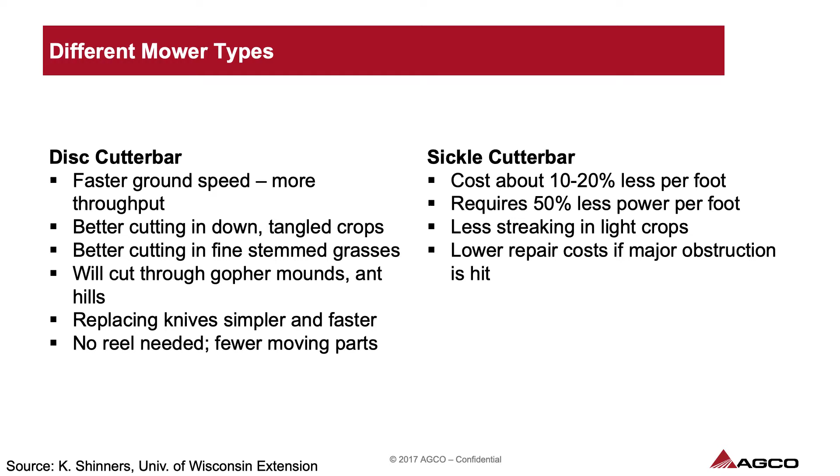All right, so we talked a little bit about that stand persistence and environmental stewardship, and it was really a concern whenever our disc mowers started coming on the market here in the United States, that because we have the opportunity to cut so much closer to the ground, we're not going to get that same stand persistence as what we were afforded with the sickle bar mower.

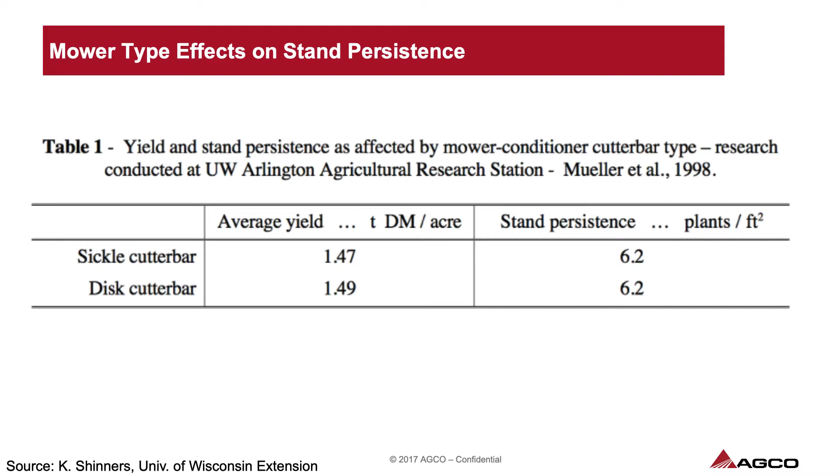But what we can see here in this study by the University of Wisconsin is, here's our sickle, here's our disc cutter bar, and if we're taking a look at the average yield in terms of tons of dry matter per acre, we really saw no difference in terms of overall yield. And this is really the important thing, this stand persistence in their alfalfa in terms of plants per square foot. And this is a year-over-year study looking at the disc mower over and over versus the sickle bar mower over and over. So keep that in mind.

Now, there are some ways that you can decimate a crop with a disc mower if you have that adjusted incorrectly. If you have that angle too low, if you're scalping the ground, and you can scalp the ground before you even realize it, that of course is going to reduce your overall stand persistence in any type of crop. But if you're still maintaining that 2.5 to 3.5 inch cutting height because you have the angle of your discs tilted back a little bit, then we're really seeing no reduction in overall stand persistence.

But what we wanted to look at was what is happening if we run this machine at different PTO speeds. So for our mowers, we're going to recommend anywhere from 520 to 550 RPM typically, but that doesn't mean that that's what our operators are doing. And also, what happens if we run this at different ground speeds?

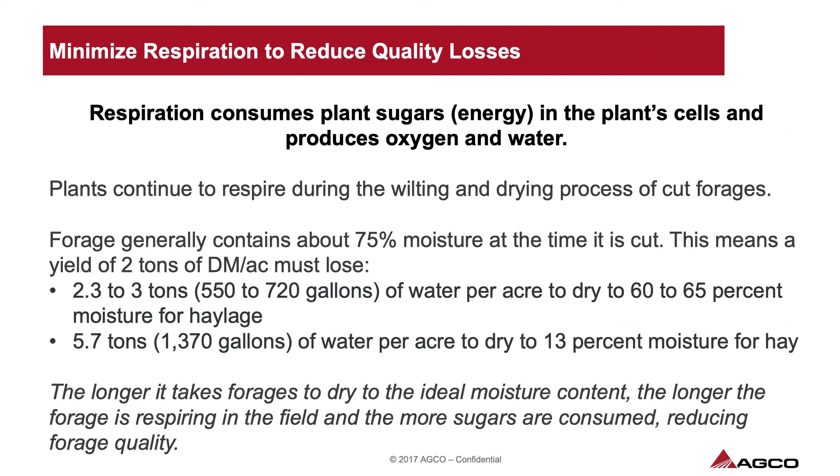I've never seen a 520 PTO cutter. Seen a 540 or a 1000. 540? Yeah, that's fine. That's still in that recommended range. But I mean, that's the way the equipment was set up for. So why would you want to run it at 420 or 620 when you weren't running it for that?

So a lot of times, we did this in conjunction with our product specialists, who are the guys that are out in the field talking to the customers. And there's misconceptions that if we run this faster, we're going to be getting a better cut quality. Or if we run this slower, we're going to be getting more of an effect of like a sickle bar mower, where it's going to be cutting much slower but a better cut quality. So that was the point in this project, was just to make sure that regardless of what your manufacturer recommendations are, we are still remaining within those recommendations.

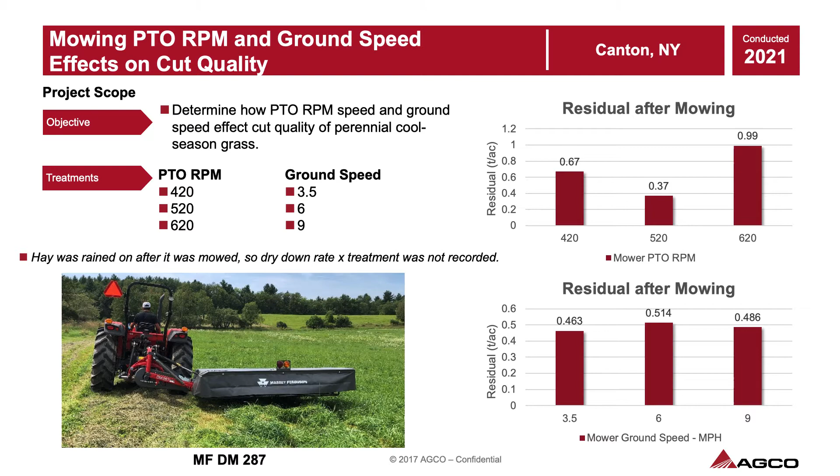And so this goes hand in hand with what Chris talked about a couple of minutes ago. And we're talking about respiration. And so refer back to what he was talking about with the goal of getting that plant down to 20% moisture as quickly as possible. That's really the name of the game if we're making dry hay. If we're making baleage, then we're going to be getting that crop to a much higher percent moisture, or haylage, or round bale silage, or whatever we want to call it. But the goal is to get it to that targeted moisture level as quickly as possible.

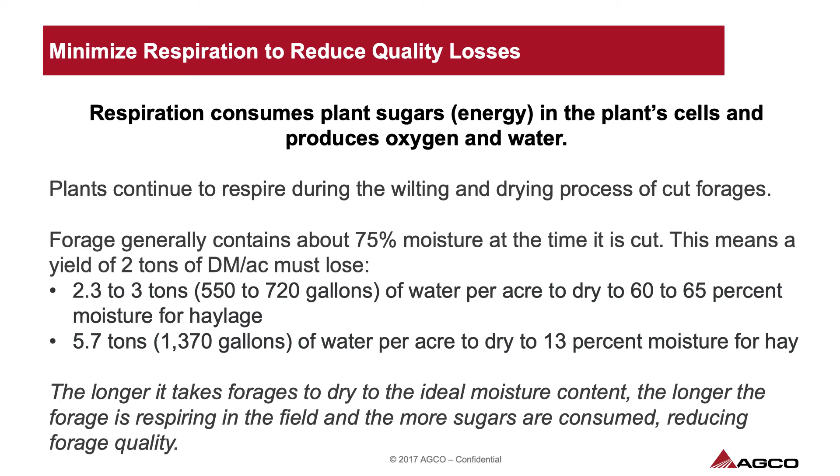And then whenever we're going from that 60 to 20% or 60 to 45%, if that's your goal for your round bale silage, or 50, or whatever the case may be, a lot of that is going to be dependent on your management practices. Are you conditioning? Are you laying your swath out wide and flat? What is your crop yield? And are you matching your conditioner settings to your overall crop yield?

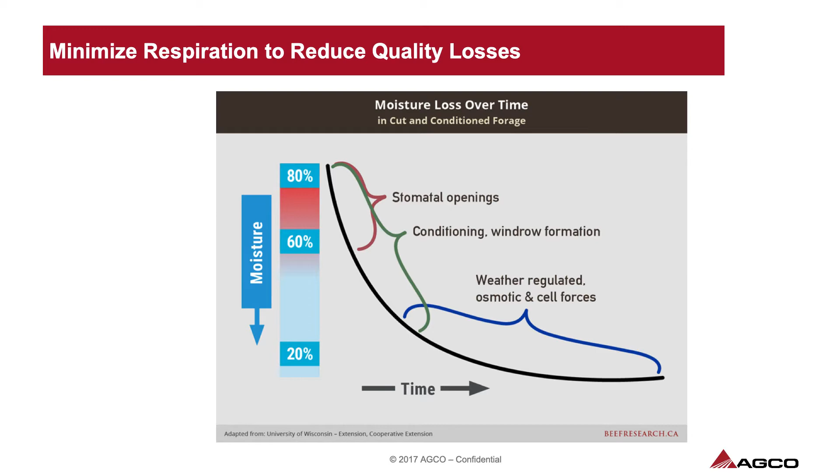So let's go in and talk a little bit more about all of those things here in the next couple of slides. Once again, Chris showed this, so we have a lot of overlap in our slides. We probably should have consulted first, but that's okay. We'll just keep talking about it.

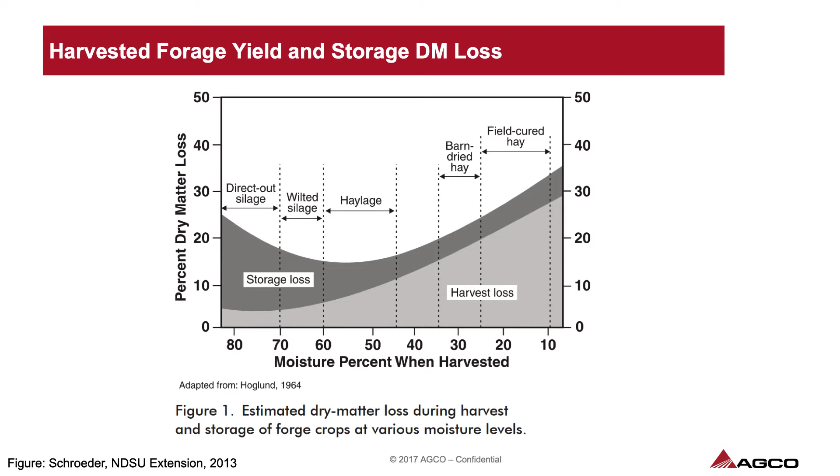Yes, a little bit of that is ash and soil content. A lot of that is the valuable nutrients that we were talking about in Chris's presentation, and it's flying out the back end of your baler. It's not being captured, it's not being baled. That's where a lot of these harvest losses are coming into play.

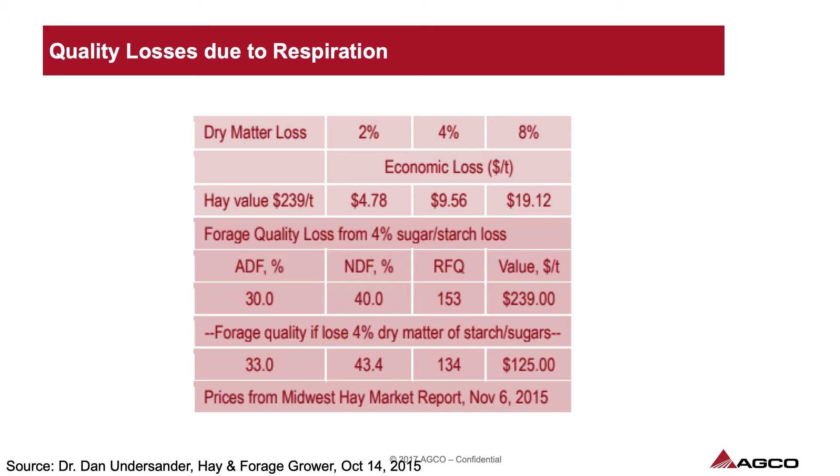This I'm going to breeze over very quickly because our hay values are going to change, but essentially what I wanted to show here was the difference a dry matter loss can have. This is looking at a $239 per ton hay value, so pretty good alfalfa hay, and what the difference is in terms of loss based on the dry matter loss within your crop. So, moral of the story is reduce your losses as much as possible.

So one of the ways that we can try and dry our crop down as quickly as possible, since we know it's important to get it to that ideal baling or chopping moisture as quickly as possible, is by using a conditioner. Typically, there's going to be two different types of conditioners. We're going to have a flail or impeller conditioner, and that's what you see here at the top. Typically, this is going to be designed for grasses.

But if you only have one mower conditioner and you're doing grasses and alfalfa, or in Europe, where I work quite a bit, grasses and clover, there are some machine adjustments that you can make if you have an impeller conditioner to try and conserve some of those really valuable leaves on your forage crop. What this is going to do is create a stripping effect.

So the goal of a conditioner is to somehow break that naturally occurring environmental defense that our forage crops have during a drought, or whenever they are cut, or whenever they think they're going to die. They have that waxy cuticle layer that helps to preserve as much moisture as possible, so we have to somehow get through that. And they also have stomatal openings, and whenever they close those stomatal openings, that helps to reduce overall moisture loss.

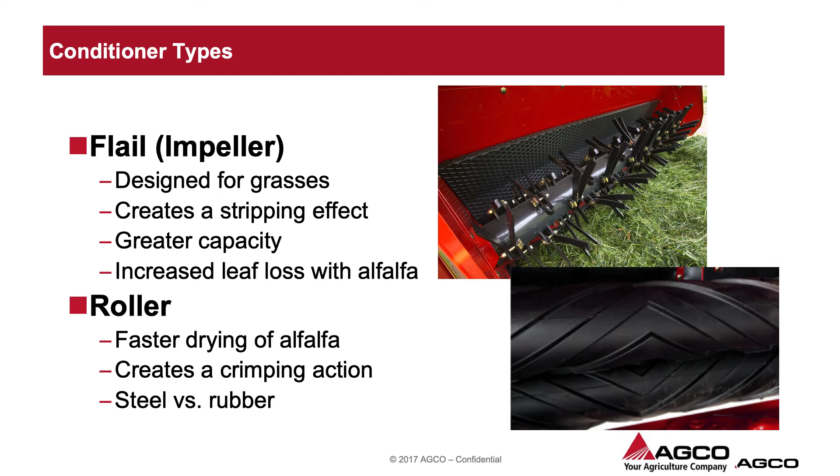We're going to talk a little bit about tension here in just a minute, but the goal is to break the stem or crimp the stem and not crush it. We don't want to bruise the crop. We don't want to remove any of those valuable nutrients. We want to crimp it and allow that moisture to dissipate from the stem without reducing any of the overall forage quality. So this is kind of what they look like close up.

I found this illustration really valuable from one of Dr. Dan Undersander's publications. And so essentially what's happening here with the impeller type conditioner is these tines are using this hood, this conditioning hood here, to actually create that abrasion across the leaves and across the stems of the grass. And it's helping to combat that waxy cuticle.

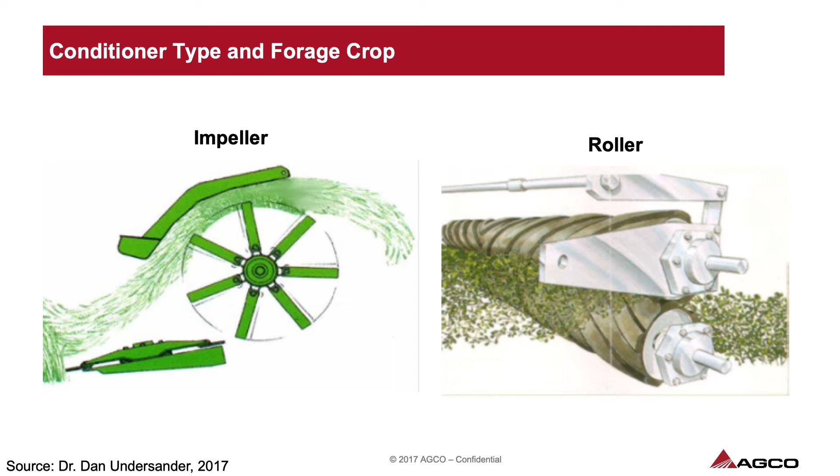And so with our rollers, right in here is going to be where the conditioning is going to be occurring. That stem is going to be crimped. It's going to come out the back side, and I'm going to show some pictures of what it should look like here in just a minute.

This is a study that was done at Penn State by actually my predecessor whenever I moved up there. And he just looked at conditioned versus not conditioned alfalfa. Very plain and simple. In the same field, he turned on the conditioners or opened up the conditioners, same mower, and took a look at what the dry down rate was going to be.

And I want you to take note of the time at which we really started seeing separation here in terms of the effects of the conditioner versus no conditioner, right around that 20 to 24 hour mark. I did another study this past summer in Wisconsin where we really saw the division right about that same time.

So moral of the story is, if you go out there 12 hours after you mow and you're like, well, dang, that stuff looks the exact same as that. It probably does. It probably is. But the goal is to get it to that lower moisture point as quickly as possible. So we talked about this right here. This 80 to 60% is really, really critical.

What we're seeing with conditioning is it's not going to have any effect in terms of getting it to that 60% any quicker. But what we're really seeing is the dry down time. We really saw a division here at this 35-hour mark in terms of conditioned versus not conditioned.

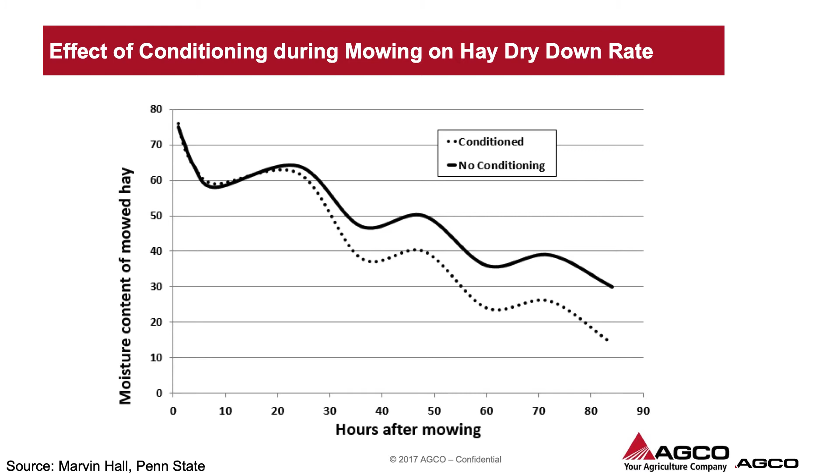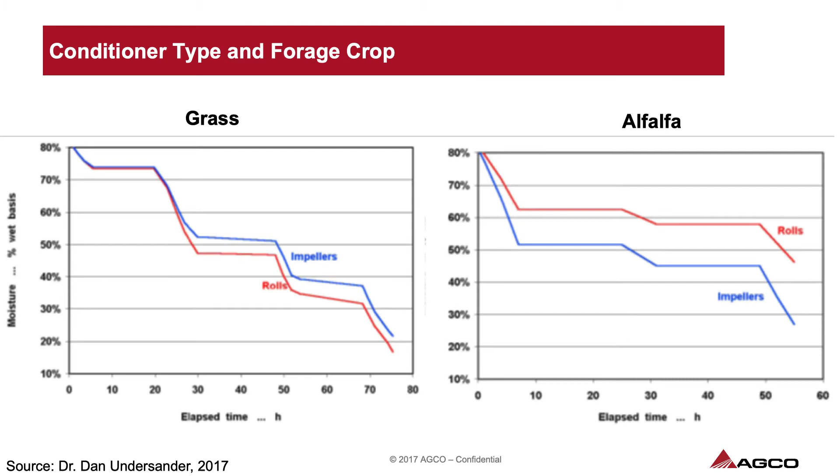This you can take a look at, but it's just taking a look at the differences in terms of dry down rates with rollers versus impellers. And this is taking a look at theoretical drying time and leaf loss, looking at our roller conditioners versus impeller conditioners. What I want to show here is this leaf loss whenever we're looking at our roller conditioners. So this is in alfalfa versus impeller conditioners.

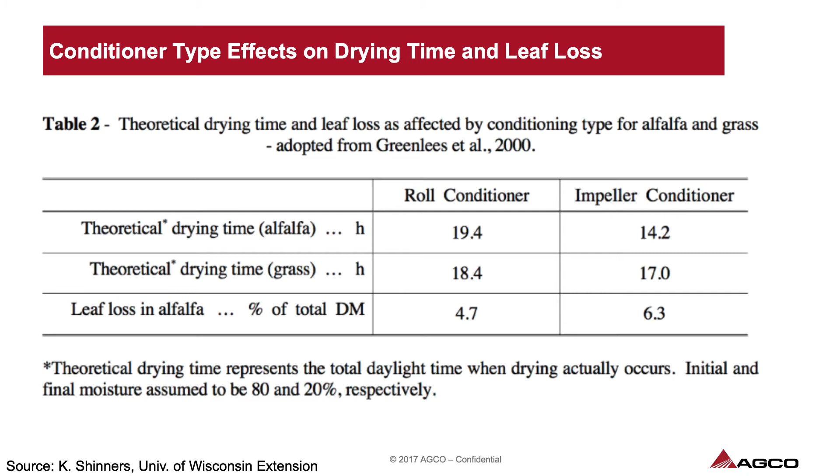The leaves are going to be where about 2/3 of those really, really vital nutrients are found in alfalfa and even in grasses. We want to conserve the leaves as much as possible. So that's why it's really important if your only option is an impeller conditioner and you're running through alfalfa, we want to make sure that we are reducing the intensity of that conditioning just so we can try to conserve those leaves as much as possible.

If you want to pull out your cell phone and take a picture of this, you're more than welcome to. I actually neglected to put this in the proceedings, and it dawned on me on my drive here yesterday that I didn't even talk about how to set your conditioners. But this is a good way to go through and make sure that the roll gap in your conditioner, so if this is taking a look at one roll, this is taking a look at another roll, is set correctly.

And so what you want to do is get 3 different pieces of aluminum foil and get a pen or a pencil or a dowel or something and roll that foil around it to create a long cylinder. You'll need someone to help you, so you're going to have 3 of these. You're going to insert that into each side of the conditioner and the center of the conditioner. Manually roll that through. Don't turn it on and try to throw it through, right? Manually roll that through. Take a look then and see what the width of your roll gap is.

That isn't lying at this point, because it can be really difficult to look in there and try to figure out, am I at 1/16 of an inch if that is your target? But this is actually telling the truth. What it's also telling is, do you have uneven roll gap? Are you at 1/16 in one place and 1/8 of an inch in another place? So what that's going to show is half of your windrow is going to get conditioned ideally. The other half probably isn't getting conditioned very much at all.

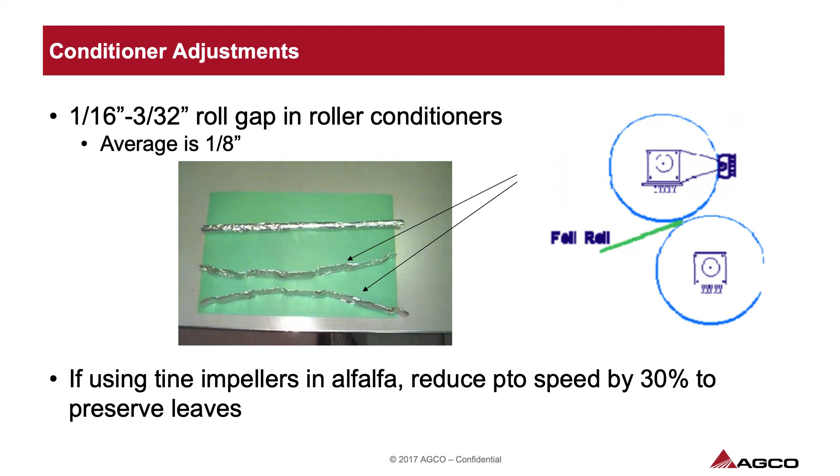But you can get this in our windrowers or swathers. It's very, very common in the western US because what we're seeing is these guys, they want a nice 16-foot header on their swather, but then they have a very narrow swath that they actually mow because they don't want to run over it. And we're not making the tires any wider, right? And so you're really restricted. Whether you have a 13-foot header or a 16-foot header, we're still making the same swath.

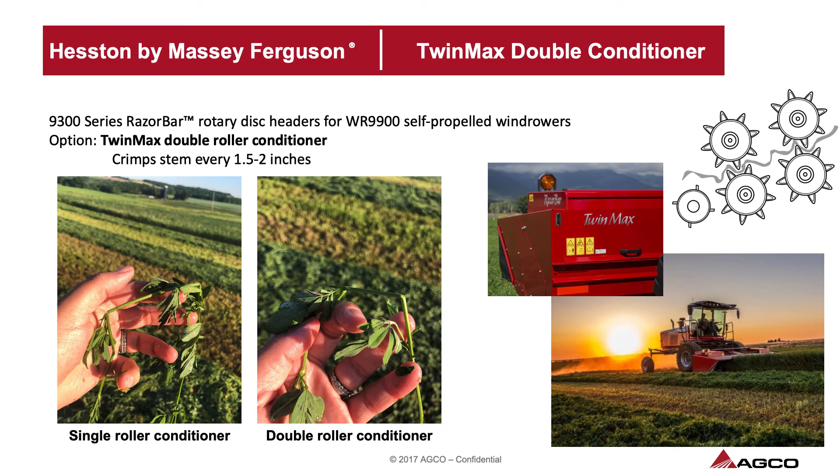And so what these guys have found is by double conditioning... so here, this is what happens if you have a single roller conditioner. You're going to get a crimp anywhere from every 3 to 4 inches. But with that double conditioner, we're getting a crimp about every 1.5 to 2 inches.

So we conducted this study in Dodgeville, Wisconsin, and we tried to conduct it somewhere without ideal drying conditions because we wanted to see how does this actually work? Because, yeah, we know it's going to do fine in Arizona, right? Like, the crop's going to dry down. It's going to dry down faster if it's double conditioned. Sure, anybody can accidentally dry hay down there. What does it do in a not so ideal condition? And of course, we had the best haymaking weather of all time because we wanted terrible conditions.

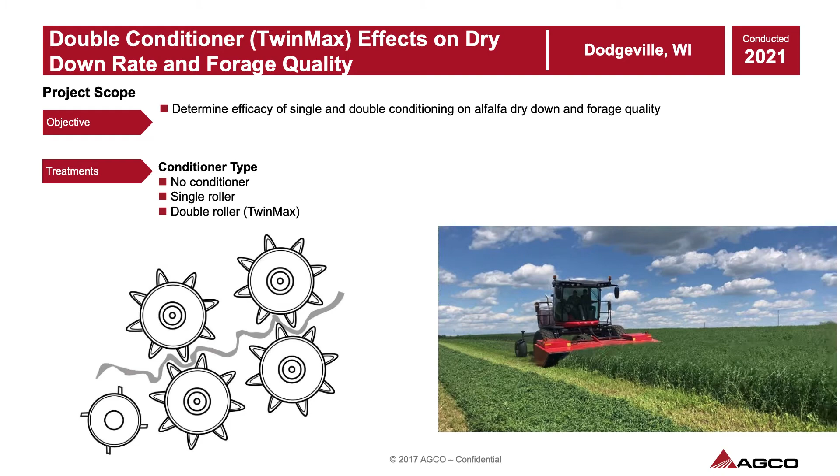So anyway, this is what we looked at. We looked at no conditioner. We just opened up the rolls, ran it through single roller versus double roller, which is what we call our Twin Max. And we wanted to take a look at the differences in dry down rate. So this is in your handouts to look a little bit closer.

Our goal was dry hay with this. So we did this on a dairy operation, like I said, in Wisconsin. He gave us a couple of acres to play around with and to collect some data on, but he definitely wanted to bale this as dry hay. So we were like, okay, good. This is really going to allow us to go through the full dry down process and get him down to some dry hay.

So what we saw, once again, if you take a look here at this division in terms of dry down rates, we did start to see some division here right about the 12-hour mark. But where we really saw it start to separate in terms of conditioned versus not conditioned, so this top line here is just flat out no conditioning whatsoever. The other two are either single or double. We really saw this separation right here at the 24-hour mark, where we saw a very noticeable divide.

But what I want to point out with this is just really a testimonial of using a conditioner in general. Yes, we did see the opportunity to bale the crop 5 to 6 hours sooner using a Twin Max, which if you're trying to beat a rain can really be beneficial. But I really just want to point out the testimonial of a conditioner in general. We could not get that hay dried to where the farmer wanted it to be without a conditioner.

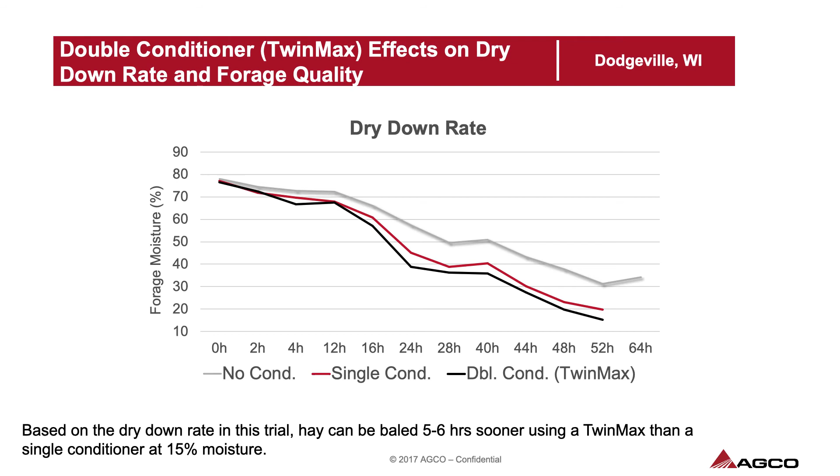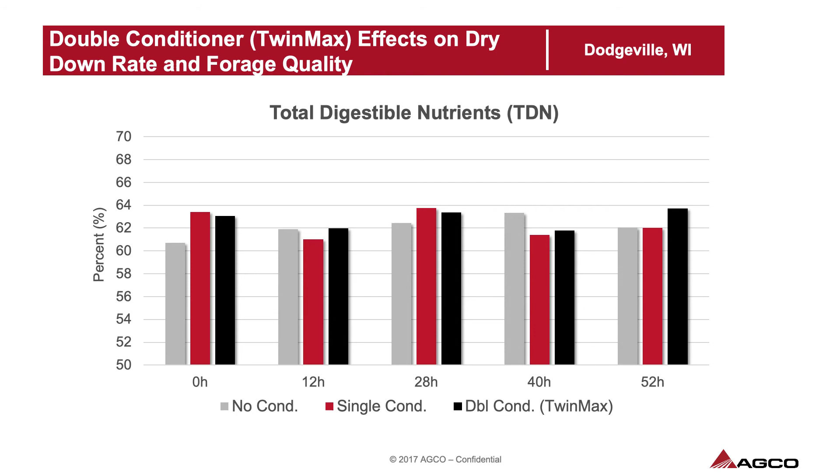But moral of the story, what I wanted to show here was at this 52-hour mark, we saw no decline. So I wanted to show if there was a decline in forage quality with our Twin Max. Not necessarily trying to prove that forage quality was better, but I want to show that there wasn't a decline, because with double the crimping, one might think, well, does it lose more leaves? What is the question? But we saw no decline in forage quality.

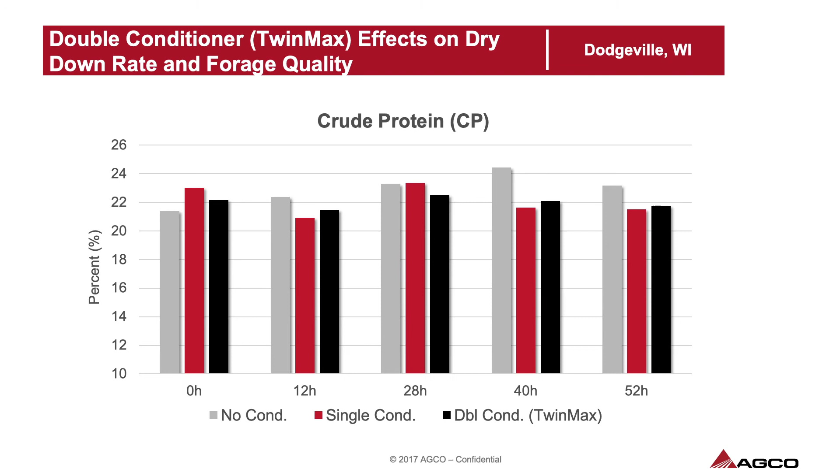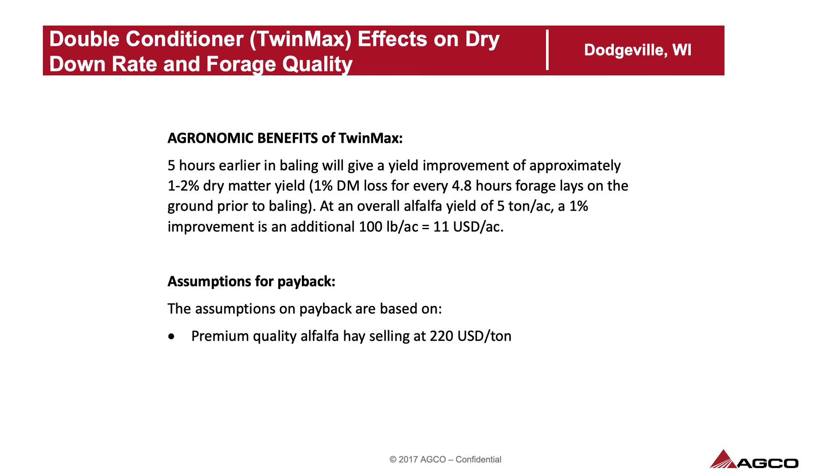If you take a look at these two up close, we only had less than a 1% crude protein difference. Really no difference in our relative feed value. And this is just taking a look at some cowboy math and what the benefits of using a double conditioner might be on a hay crop that's drying down in the field. Now, that was taking a look at our conditioners.

The next most important thing is going to be your swath width. So I talked a little bit about how in the western U.S. on our commercial hay operations, those guys want to move across the field as quickly as possible. They have thousands and thousands of acres to move across. So they have a big 16-foot header. They're running 4 or 5 windrowers in the field, but their swath is only as wide as their tires because they do not want to run over their hay for obvious reasons.

So they're really seeing a lack of dry down because they're not laying that swath as wide and flat as what it should be. So instead of it being called a windrow, maybe it should be called a sunrow, because really the goal is to try and get as much sunlight on that crop as possible to try and get it dried down. And so we talked about why that's so important many times up to this point.

But essentially what this is taking a look at is just generally what we're calling a wide swath versus a narrow swath. And I believe in this study, the wide swath was about 80% the width of the cutter bar. And really, if you're using some type of pull-type mower, that's what we're going to recommend to get the quickest dry down, is about 70 to 80% the width of your cutter bar.

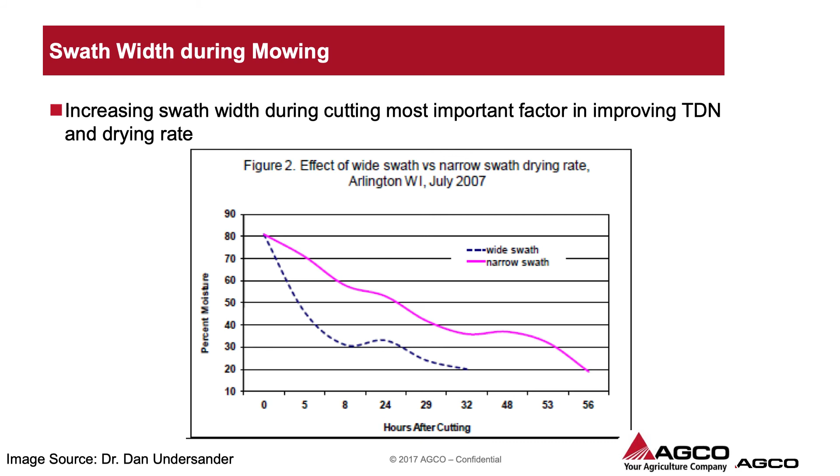So that's why it's important to lay that swath wide and flat and allow it to dry down as quickly as possible. And this does have a huge effect if we're doing baleage. We saw maybe a questionable effect for our conditioner. There is no questionable effect in terms of a wide, flat swath for getting that crop dried down to the ideal moisture for our baleage.

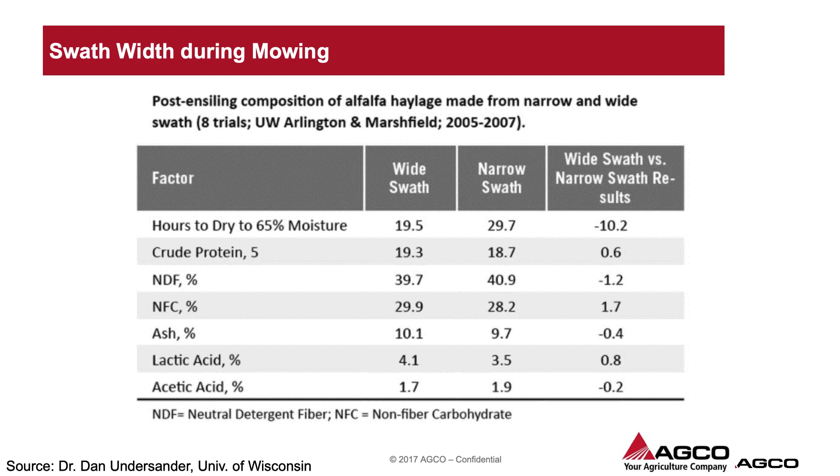So this is taking a look once again at a wide swath versus a narrow swath. If we're taking a look here at the total hours to 65% moisture, we saw a 10-hour reduction by laying that swath wide and flat. We saw a slight improvement in crude protein, a slight improvement in our lactic acid ratio, which Chris talked about why that's so very important.

I wanted to throw this in here, and you can just look at it for fun, but we essentially did similar treatments to what we did for our mower project. But I added the tedder in here. Who in here is tedding their alfalfa? You're not in trouble. Raise your hand. So with tedding, there's so many different schools of thought of when to do it, and maybe we can talk about that this afternoon as well.

Some people will follow the mower with the tedder and get it laid out even wider, even flatter. So the goal of what we did here was to look at different ground speeds, and our goal was to get the least variability in our swath spread with the tedder as possible. We didn't want those chunks that sometimes come out because that's going to reduce dry down. We wanted it flat, we wanted it smooth, we wanted it all the way across the field. We wanted 100% ground cover, right? We want it to completely cover that ground.

But I do want you to think about using a tedder if your soil is very, very wet. A lot of times, allowing that swath to sit after mowing for a few hours is really going to benefit the overall dry down rate because it's going to allow the sun to help reduce the moisture level of the soil and not just of the mowed crop. So think that through.

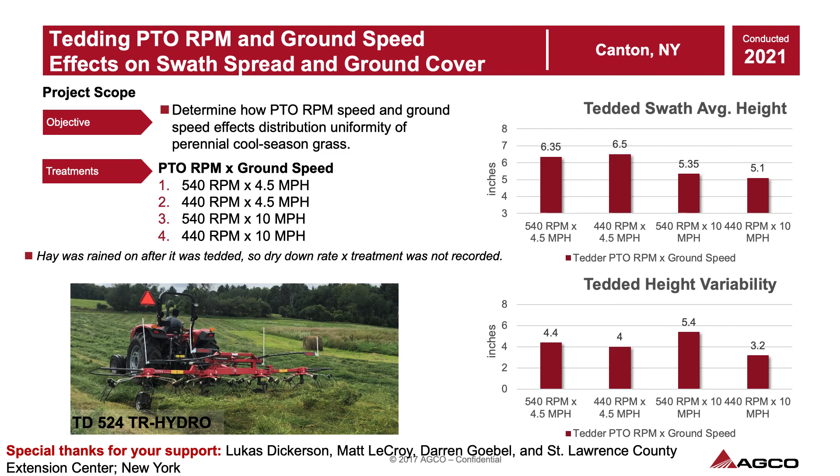A lot of times, if you're mowing on a dry day, just go ahead and ted that stuff because it's going to increase the dry down rate even faster. If you have a very, very wet soil, think about allowing that soil to dry down a little bit because it's going to inhibit the overall dry down rate of that crop.

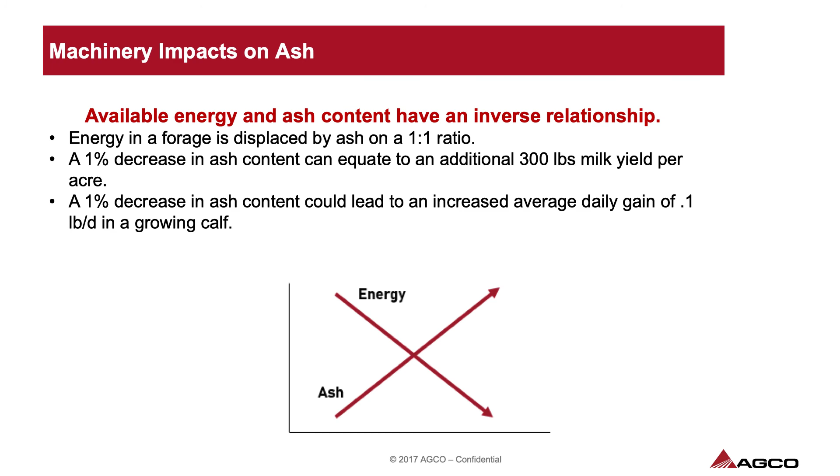This is just showing the inverse relationship of ash and energy of your crop. So it has a 1-to-1 displacement ratio. And because we're talking about mowing, I felt the need to add a little bit of information in here about ash content. This is a huge inhibitor in terms of feed value or crop value or sale or whatever market price in the Western United States. I know that a lot of you guys are probably making hay and feeding it to your own livestock and maybe making hay and selling it locally. For the export market, ash is a really, really big cost reducer.

So our disc cutter bar is typically going to have higher levels of ash in the hay. We do have our mowers that are known for picking up more ash, but the reason that they're picking up more versus a drum mower or a sickle bar mower is because typically they're closer to the ground. And so the closer to the ground they're going to be, the more ash they're going to consume.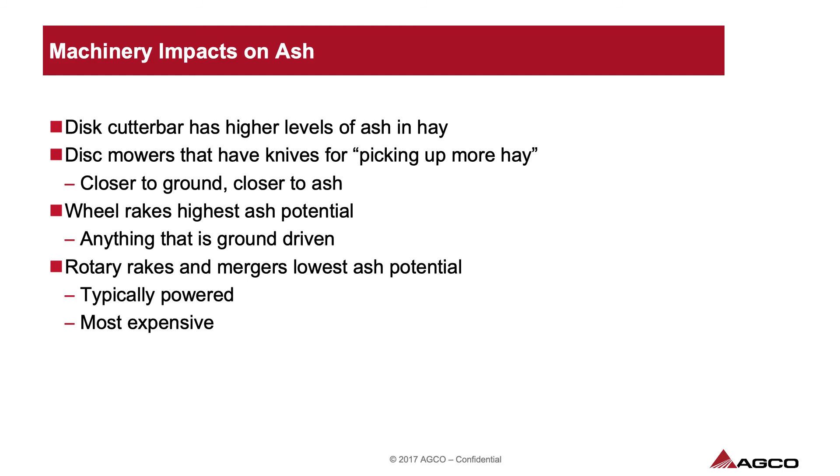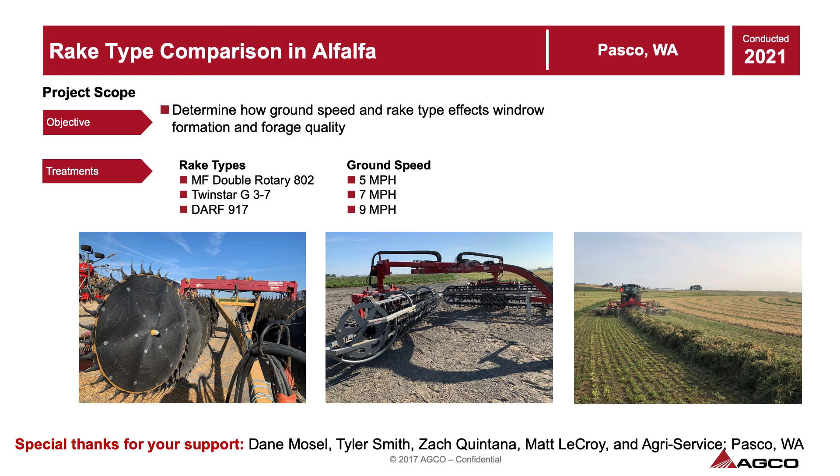We did this in Washington. We wanted to look at those volcanic ash soils. If you ever get a chance to go out to Washington, get out of the truck, walk in a field, and take a look at what you're walking in. The soil is the same color as this ground, and your foot will sink about halfway down into it. It's like a very powdery sand, but it's very ashy. It has the potential for huge amounts of ash incorporation into the crop. So we wanted to go to the ashiest place we could to see the effect of these different types of rakes on forage quality.

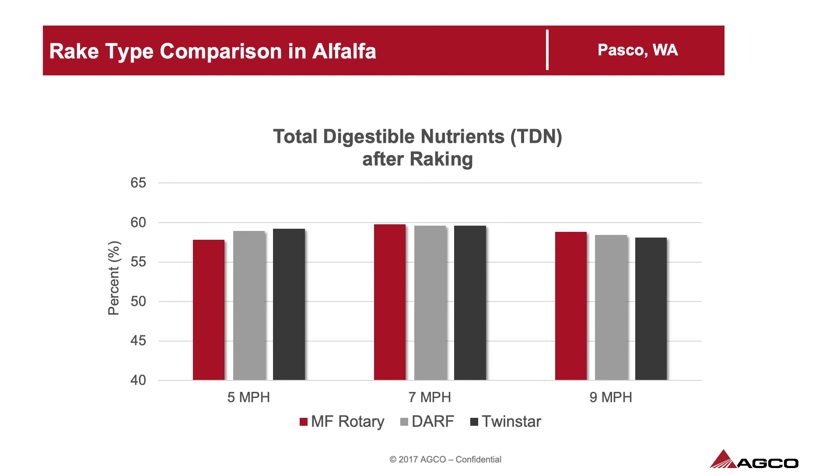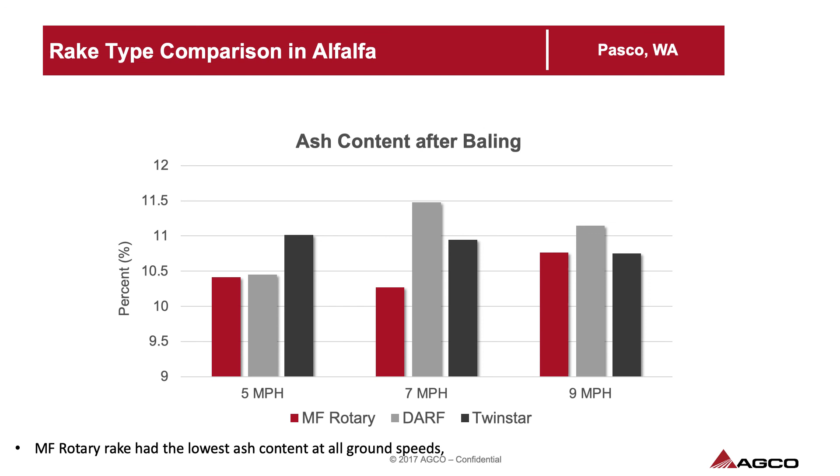So we ran all three rakes at different speeds across the field. We really saw that there was no reduction in overall total digestible nutrients. That was after raking. This is after baling. Again, like a 1% change in total digestible nutrients. This is taking a look at the ash content after baling, and you all have all of these in your proceedings. That's why I'm just flying through them. You can look at them.

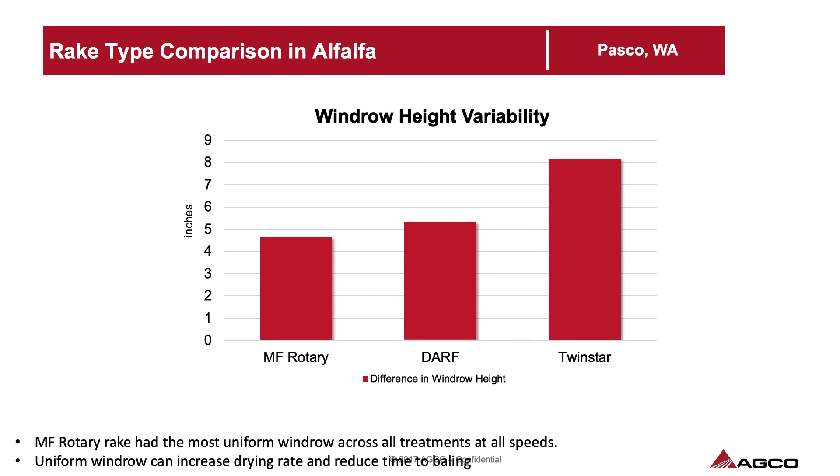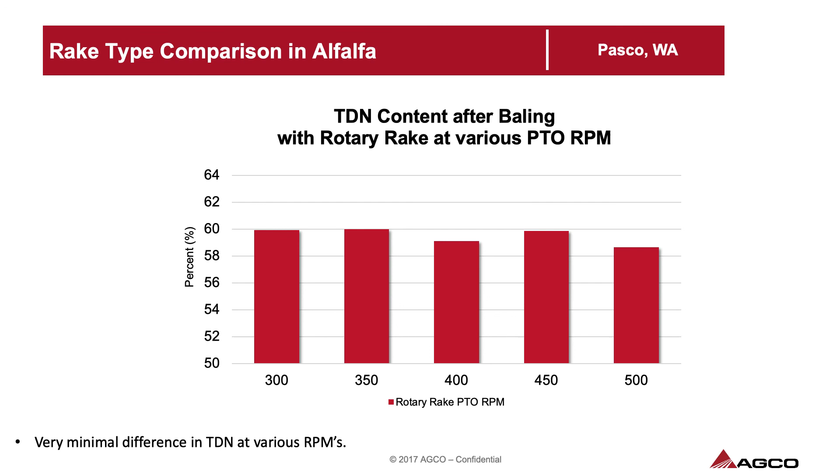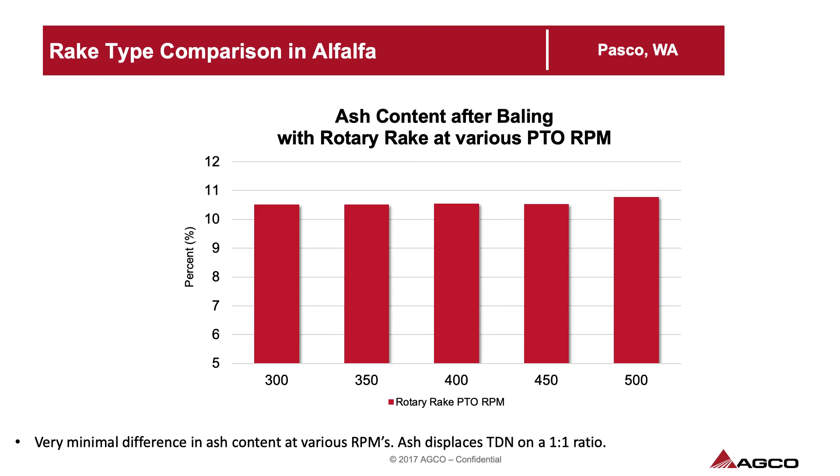And then what we also wanted to look at was windrow height variability. We wanted a nice, even, fluffy windrow. We didn't want a windrow that was roped, and if you have roping of your windrow, that really inhibits the air flow through it. So if it's not ready to bale, it's going to stay high in moisture a lot longer. We saw with our rotary rake that we actually had a much more uniform and fluffy windrow. This is taking a look at our rotary rake PTO RPM differences across the field. No difference in terms of total digestible nutrient content or ash content. So we could run that rake at many different PTO speeds and really see no negative effect.